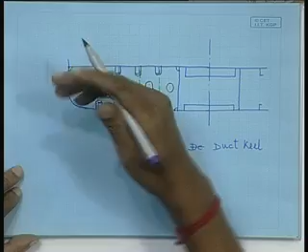So, today we will be starting with duct keels. Wing tanks, we have talked about yesterday. Duct keel. We have been talking about the keel plate, bottom shell plate, right? There the central plate at the bottom shell was the keel plate. Now, here is a concept called duct keel.

As you can see in this figure, this particular assembly is the duct keel. That means this one, the one which is encircled, that particular construction is referred to as duct keel construction. It's nothing but part of the double bottom, right? We are separating it out. Like we have talked about double bottom, this part is familiar.

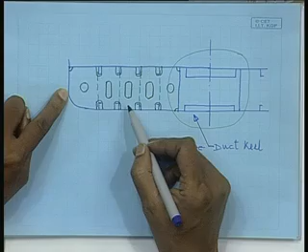There we have the plate floor, the bottom, inner bottom longitudinals, stiffeners, and here instead of a central line girder, I have two side girders, right? Previously we have seen one central line girder and a keel plate below. So, here the central line girder has been replaced by two side girders, and rest everything remains same. Only one half is shown; the same thing is on the other side also.

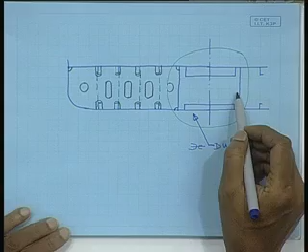So, this arrangement of two adjacent side girders near the central line is referred to as duct keel. The duct keel arrangement is forming a duct, right? This space, as you can see, is forming a clean duct, and this is running all along the length of the ship, as I have tried to show here. These are the two side girders running along the length of the vessel. It's only one block we are showing. These two are watertight side girders, so this space becomes a protected closed duct.

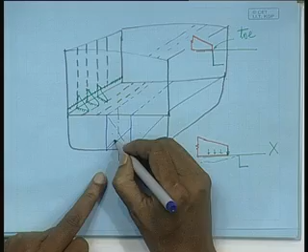What is the great use of this arrangement? One is definitely it provides a much better support for the ship structure. We had been talking about putting the ship on keel blocks, right? There the central line girder is there, you have the keel plate, below that the central line row of keel blocks. Here, if I put the keel block, it gets an even better support. The vessel gets a much better support, because the whole load is now being shared by two girders instead of one. So, that is one advantage.

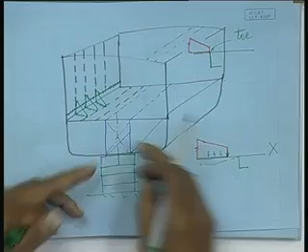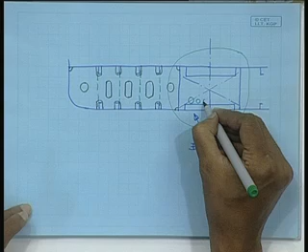Second advantage, instead of one central line girder, I have two of them. So, obviously, it provides higher longitudinal strength. And thirdly, which becomes very effective, this particular duct can be used for laying the pipes or various kinds of ducts, cables, right? Because all along the length you will have all kinds of pipelines running, electrical cables running.

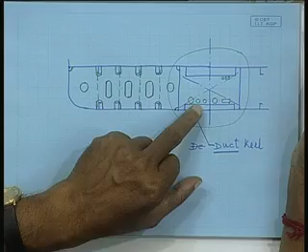Otherwise, had there been no duct keel, they would have had to run through the double bottom space somewhere. If that space is being used for ballasting, they would have been submerged in water whenever it is in ballasted condition. Whenever it is empty, fine. But here they get a very neat and clean environment. So, the maintenance of these pipelines or cables becomes easier, and the possible corrosion of the pipeline is also less. Otherwise, they would have had to pass through spaces carrying fuel oil, fresh water or ballast water.

So, this space not only helps in providing better strength, but also provides a good space for passage of these pipes, cables, etc. If anything else is needed, some ventilation duct or ballast pipe, drainage pipe, various kinds of piping systems, that space can be used.

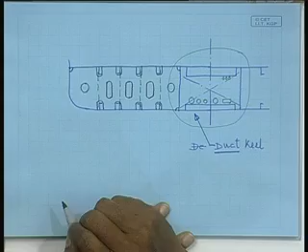Now, as far as the structural details are concerned, as you can see, the rest of the double bottom is longitudinally stiffened, right. But here we have drawn transverse stiffeners. This is a transverse frame, and at the bottom also is a transverse stiffener, instead of any longitudinal. Why? Because the spacing is the frame spacing. This is one frame space.

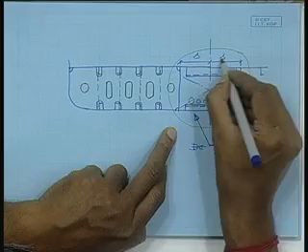Generally, the side girders will be placed one frame space port and starboard. That means the size of the duct will be twice the frame spacing, right. If it is twice the frame spacing, then either you provide, at the center line, some bottom longitudinal and inner bottom longitudinal here, or provide a transverse stiffening member.

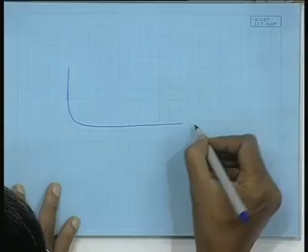Here the transverse stiffening member is the preferred stiffening arrangement, because in that case, over this you can lay the pipelines, you can lay the cables. We have talked about that the longitudinal framing system is better to adopt, isn't it, because of its superiority in terms of buckling strength. Now, here we are deviating a little bit from that.

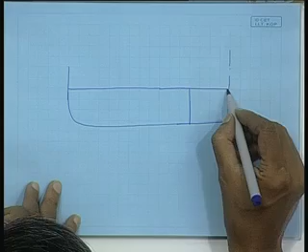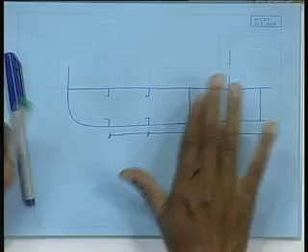I am just drawing only the duct keel part, right. So, the stiffeners are like this. This is my frame spacing, they are equally spaced. So here the unsupported span of the tank top plating or the inner bottom plating, as well as that of the bottom shell plating, is becoming twice the frame space, because here we have the two girders spaced one frame space apart, right. So naturally you will have to have a strengthening member like this, because there is no point giving another center line girder here, then the whole purpose is lost, right.

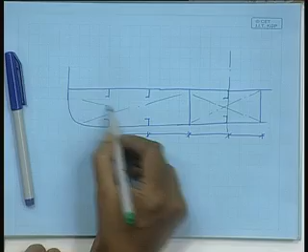So, if I provide like this, it is also a feasible solution, right. And this space now is becoming available to me. I can keep it empty, I can use it for ballasting, I can use it for fresh water, anything. But for that, all these spaces are already there. So this space is gainfully utilized for passage of pipes, cables, ducts, right, that becomes convenient.

So, if that is so, then I will have to lay the pipes, for example. How do I lay it? Because you cannot just keep the pipe on the floor, you have to tie it, clamp it, right. So then you have to keep the pipes on the shell, which is preferably not a very good idea, because how do I then clamp it? It has to be clamped to the shell. So I will be unnecessarily doing some welding here, which may not be a good idea.

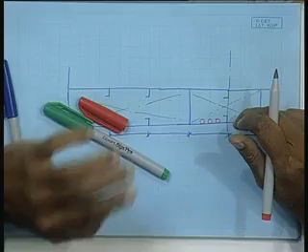Why? Because in time, all these pipes sometime or other will need some maintenance. You have to open it, replace it, repair it. Every time you do that, this welding has to be cut and re-welded, and that is not a very healthy thing to do on the shell plate, because by doing welding, you may impart some flaw there, which eventually can cause further damage to the structure.

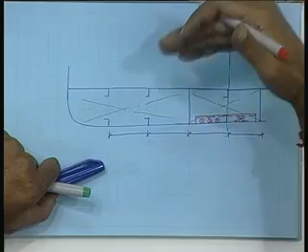So instead of that, it will be better if you have some platform, some support over which you lay the pipes like this. So in that case, instead of having a longitudinal stiffener here, we have a transverse stiffener. That means at every frame space you put transverses. Like in this plane you have the floor, similarly the transverse stiffeners, but they will go at every frame space, right, like this.

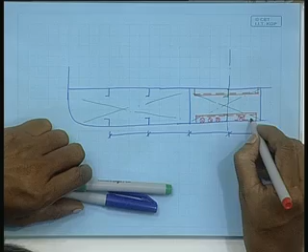So this frame is referred to as the bottom frame of the duct keel, and this is referred to as the reverse frame of the duct keel. You know, all members have some name. So that is the name. This is the bottom frame of the duct keel, that is the reverse frame of the duct keel.

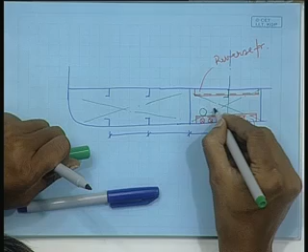Now, that is how it provides necessary strengthening to the bottom shell as well as to the inner bottom plating, and also provides sufficient space, as well as proper means of laying your pipelines and cables and all other utility services, whatever lines are to be taken, right. So it can be laid there. The purpose of this transverse plate is not only for laying these pipes. Main purpose is for stiffening this unsupported span.

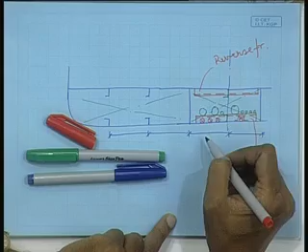Right. Main purpose is that, and while doing that, I simultaneously get as a byproduct a good support. It does not give a surface as such, because you have the frames at intervals, but I have one horizontal plane where I get a good support to put these pipes, cables, etc. Main purpose is providing stiffening, to provide strength, to give the required section modulus, because if the stiffeners are not there, under load this will deflect, isn't it, because it can sustain an unsupported span of only the frame space.

So then, will it be better to go for a longitudinal frame? It's not a question of better or worse here, because if I provide a longitudinal frame, well, it is supported. With a transverse frame, it is actually better supported, because then the entire plate is supported here, right, and I am providing it at every frame space. Only thing, to provide the proper load path, you have to put the brackets like this, right, with this side girder. Now it is bracketed.

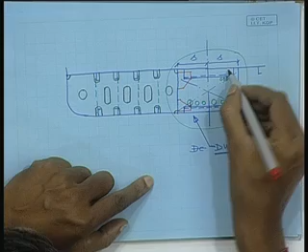So, brackets are provided. So, sir, no need for that longitudinal. There is no more need for longitudinal. This longitudinal is not there. The construction is like this, right? Or a cleaner version, let me draw, I will show you.

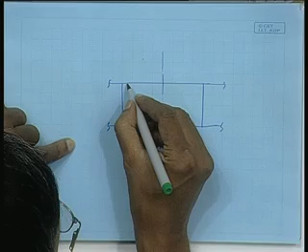So, what is happening is, you have this bottom shell plate and the inner bottom plate, right. Then you have one side girder, the other side girder, right, and then you have your, well, let us draw by different color, it will be visible better. So, this is reverse frame.

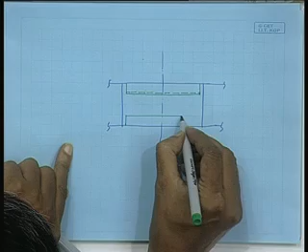The significance of this dotted line, what does it mean? This dotted line I drew, what does this signify? Angle section. Hmm? So that is an angle section. No, that there is a flange. Okay, that is a very particular answer. Angles. It can be also a bulb section, right? But not T section. Had it been T section, this line would have been continuous.

It's a flanged stiffener. That flange can be a flat bar, right? That of an angle section, or can be a bulb section. If it is a bulb section, that is also a kind of a flange. That is also shown by dotted line, dotted or firm line. Dotted line means it's on the other side of this plane, right?

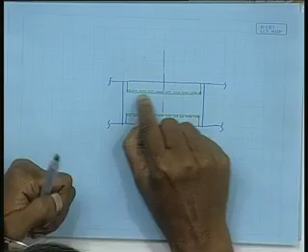Why I have shown it dotted? Just to show the bracket in full lines. Otherwise, that means the bracket is on this plane. Had this stiffener been on this side, I would have drawn a firm line. The bracket is on the other side. It is a simple thing, but these are important because you see where you will put this. Okay, let us first draw the bracket, then we will come back to this. And the bracket is something like this.

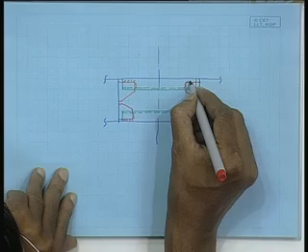So, this is welded, right, and obviously the other leg of the bracket is welded to the girders. Okay. So, this arrangement is repeated at every frame space along the length of the vessel, right. This arrangement is repeated at every frame space, right. So, what happens? This is very well stiffened, right.

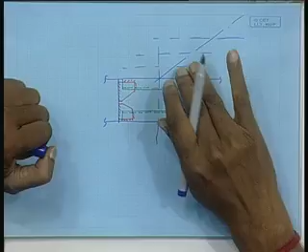I mean to take any load whatever is coming on the deck, on the tank top, as well as when it is being put on the keel blocks, because the keel blocks, as we have told you, are only at intervals, right. Obviously it is not a continuous support. This is my ground level, and you have the keel blocks like this. A block of wood, stack of wood, particular dimension over which it sits, right.

There can be three such rows of blocks over which the vessel sits, because of how you build the vessel. We have talked about units and blocks, right. Those blocks have to be joined together. How do you do that? So, those blocks are brought and placed over such keel blocks. They are aligned properly and welded. Entire hull is welded, and then all the necessary structural connections internally are made. All the pipe connections, cable connections, all continuity are done.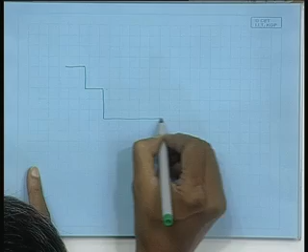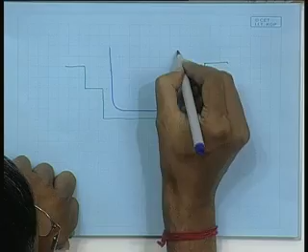So, once that is completed for the entire length, then this whole thing has to be lifted and put in water. Is it really lifted and put in water? It is either slid down, right, or floated up, one of these two. Okay, a little bit we are deviating from our topic, but still maybe that is worthwhile to know. So, there are two ways of doing it. Say, so it can be something like this.

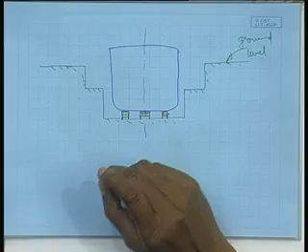When we are talking about keel blocks, that becomes more relevant in this case. This is a cross section. What we have drawn is that of a, what is it? What do you think it is? I have tried to draw. Is it not telling you anything? This is the ground level. What is this?

Say a ship is built, right? It is delivered, it's serving its purpose, then say after 5 years you have to bring it back and do some underwater repair, right? I mean the underwater part of the hull, the painting has got spoiled, or some small damages have taken place, or whatever. Even if nothing has happened, there is a mandatory requirement that you will have to make it dry and do thorough inspection, and whatever flaws you find, you will have to do necessary repair. How do you do that?

You have to bring it to the shore, isn't it? You have to lift it up in the shore. How do you lift it? Is it physically possible? Then what do you do? Dry dock. This is a section of a dry dock, right? This is what is a so-called dry dock. Water is removed from it. So what happens? The dry dock extends to the waterfront.

There are gates, vertical gates. So this is the dock. You have the vertical gates. So if you open the gate, water will come in. You close the gate, pump out the water, it becomes dry. That is how. For taking in water, we do not open the gate, we rather pump in water and then open, because if you suddenly open, you cannot do that, neither can you open it, the amount of force it will be. In any case, there is a dry dock. So in this dry dock,

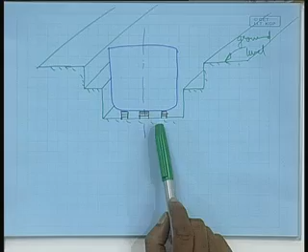when we had been talking about the various characteristics of the shipbuilding industry, this is another important phenomenon in this particular industry, that for any other industrial product, delivery to the customer is not a very big issue. Physical delivery to the customer. When we talk about industrial products of consumer nature, even the customer himself takes care of the delivery.

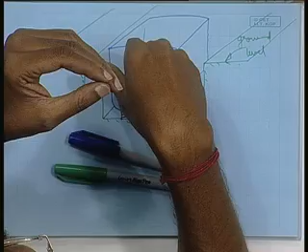When you buy a television, generally you go to the shop and bring back the television. The seller puts it in a packet which is comfortable to handle, so one can lift it and put it in the car. When you take delivery of an automobile, you just drive it out from the showroom. When you take delivery of an aircraft, you just drive it out from the hangar. But when you take delivery of a ship, you cannot drive it out. You cannot lift it and put it in your car.

It has to be first made waterborne. First you have to put it in water, then only you can drive it out. An aircraft will remain on ground; of its own power you can drive it out and fly off if you have an airport nearby. So this is very peculiar. This product you have to first put in water, and putting it in water itself is an exercise, because the size is such that you cannot lift it. So it has to slide down using its own weight. This process of putting vessels in water is termed launching.

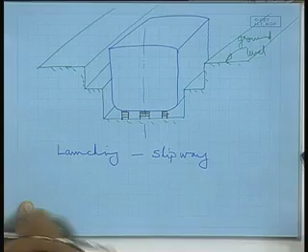Launching, right? It can be launching through a slipway. Launching means putting it in water, because you cannot go on constructing it while afloat. You can, but it makes your life much more difficult. On water it will keep moving, and not everything you will be able to do. The hull work you will have to do on shore. Doing it in water is possible, but much more difficult. So it has to be on shore.

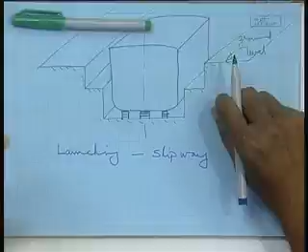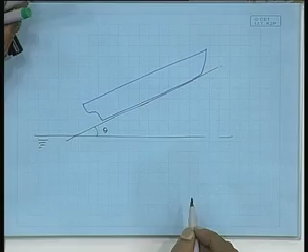Once the whole thing is built, it becomes so huge, so putting it in water itself becomes an issue, and one way would be through a slipway. You slide it down. It sounds very interesting, slide it down, like this. Of course, I am drawing it in a very exaggerated fashion. The angle is never this much. This is referred to as declivity. So this is my water level. So what happens? It slides down.

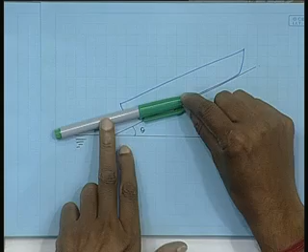When it is sliding down, what is the guarantee that it will not plunge in water? The way I have drawn, isn't it appearing that it goes like this? So the whole process of launching has to be designed so that when it goes in, it floats up, almost like the movement of this pen. It will go in water, and at a certain point it will start turning like this and become afloat. If that does not happen, it goes straight in. Because this will be the built up space.

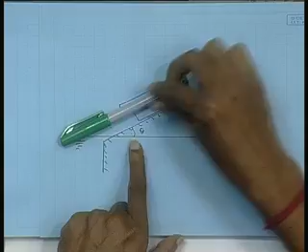So, if this happens, that means it is going in water, and then it should float up. What does that mean? That means it should go on getting buoyancy, develop sufficient buoyancy such that a moment will start working and putting it up. So, this moment and the going down moment, which is called tipping moment, right. The difference between these two: the pivoting moment should be higher.

So, that means it matters where the CG is, isn't it? Otherwise, what will happen? It will go and it will just plunge in water like this. So, that is what is called anti-tipping moment. Anyway, so you can see the whole process is tedious. Not only that, it will float up and will not remain steady, it will keep drifting.

And imagine your river width where you are launching, suppose the width is not sufficient, say 800 meters. So, it goes in water and it will keep drifting and go and hit the other side. You can't stop it. Had it been a car, you could have jammed the brakes. Here what do you do? Run the engine?

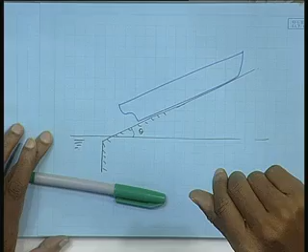You cannot run the engine because when you put it in water, the engines are still not fully installed, because ships are put in water from the slipway in a semi-complete condition. Semi-complete means all the steel work has been done, but many of the fitting out works will be done elsewhere. Why? Because the slipway is an expensive thing. Like a house you built, you erect the walls very fast, but then substantial time goes in fitting the plumbing, electricity, all that.

Same thing in ships. The erection of the hull, the steel work, is very fast, but then putting in the machineries, laying the pipelines, the cables, the fitting out work, all kinds of auxiliary machines, everything, takes a much longer period. So you cannot keep the slipway engaged on that, because that can be done while the vessel is afloat.

In the afloat condition that is possible to do, because you will be working on board, inside the vessel. So no problem if there is water outside or if the vessel is floating and making some movements. So that is why it is launched, right? When it is launched, obviously propeller, shaft, everything is not fitted. So you do not have power, you have no mechanism to brake, so it may go and hit. Then what is the solution?

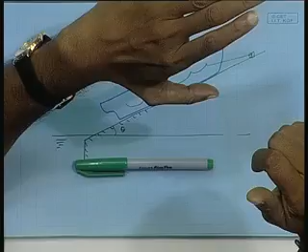So you will have to have arrangements for braking. There are ways: you have chains connected which are clamped on the shore. Now if you really connect it in such a fashion that the vessel goes, and you can imagine the momentum, right? Either it will break the chain or it will tear off the plate where it is connected. So the purpose is not served.

So that is what is very interestingly done. These connections are such that slowly, when it floats in the water, gradually the tension comes on this chain, right? One after another they will start failing in a sequential fashion. So that will absorb the momentum. It will fail in such a fashion that it will not cause harm to the hull, but only the connection will give way, right? One after another. That is very interesting, how it is done.

But still there is a risk. If you do it wrongly, your hull gets damaged, or if you are too careful to protect the hull, then the braking becomes ineffective, meaning you go and hit the other side. What is the other solution? Side launch it. Instead of end launching, which is what this is called, where it launches and goes and hits, I launch it sidewise.

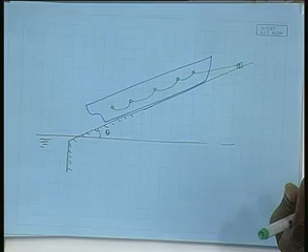But the problem of tipping is much more, right? So that's a very tedious job. All these operations are very clumsy and tedious. I won't say difficult, tedious. Best is you build it in a dry dock. In the dry dock, the dock is dry, meaning the gate is closed. You have the rows of keel blocks laid, and depending on your handling capacity, you start installing the sub-assemblies here.

Generally the minimum thing installed is the units, meaning you start with the double bottom and then bring the side shell to erect, or if you have more handling capacity, this entire block is fabricated in the shop floor. From there it is transported here. From the shop floor you will not bring it hanging in a crane, you will bring it in transporters. There are specific heavy duty transporters which can carry such loads. So, you will bring it, and from there with a crane you put it on the keel blocks. So, there the function of the keel blocks comes mainly.

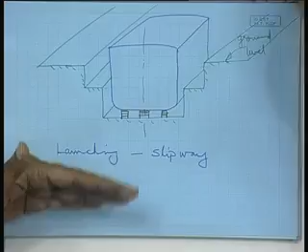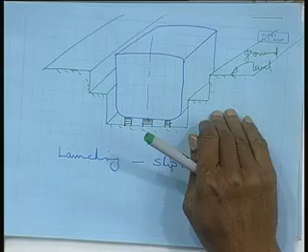And when everything is complete, and here the advantage is you complete everything and then start taking water inside, release it. So, it will float up automatically and go out. When it is on the slipway, these keel blocks are not there. There is a different kind of support, but for construction, repair, maintenance, or dry inspection, you have to put it in a dry dock. This is a dry dock, where it will sit over these keel blocks, and the load comes on them.

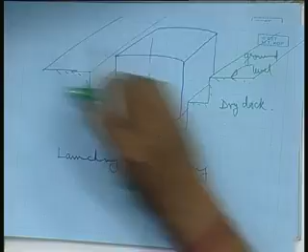So, you can see the entire load of the vessel will be supported at only certain points, 3 columns of blocks and a certain number of rows, with sufficient gap between them. So, the entire weight of the vessel is supported at these points. So, naturally the structure has to be very strong there. How these keel blocks will be laid will depend on the construction inside; where the keel blocks are to be spaced, you will have to have some heavy stiffening members there.

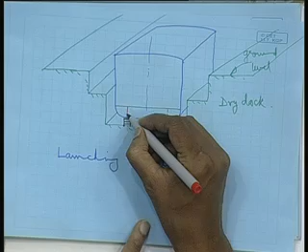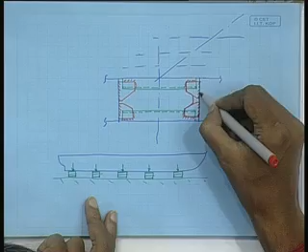You cannot keep the block somewhere here, that place will get dented, isn't it? So, that is also one aspect of the stiffening members, to support the load. So, that is the function of the duct keels, and here as we see the connections are with brackets. This is the simplest way of doing it, you have 4 separate brackets. So, the alignment problem is not there at all, or it can be converted into just one piece like this.

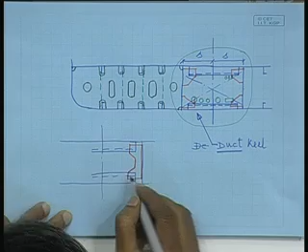That means here you have the bottom shell plate on one side, this is the reverse frame, you have the bottom frame, and you provide a bracket of this shape. That is also possible. Then, the function of brackets is to provide for the end connection, a proper end connection, to provide for adequate load bearing area.

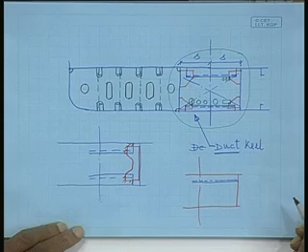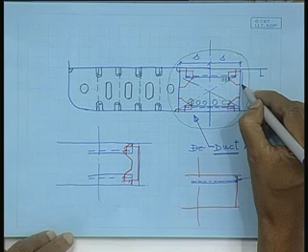Because if, instead of providing the bracket, I had extended the frame and welded only there, say you have the side girder and I just extend it right up to the end, this corner I cut off, it needs to be cut off because of the fillet welding there. So, I get only this much of welding area, the welding area is much less, isn't it? By providing a bracket, I am increasing the welding area so much. That means the load support is increasing.

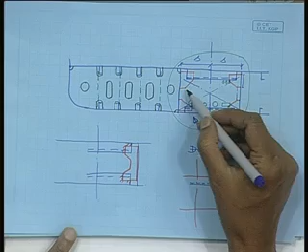So, if I do it this way, as far as the reverse frame and the bottom frame are concerned, they are perfectly fine. But what about the stiffening of these girders? Because they will be there at every frame space. So, either I have to provide an additional stiffener here, or I make it as a continuous piece. One single piece does both jobs, because providing a stiffener, again the question of end connections will come. And depending on the depth of the double bottom and the size of the brackets, there will be a small space left. Providing another small stiffener, it should have continuity with the bracket connection. So, that may prove to be a difficult alignment problem, because not all will be correctly spaced.

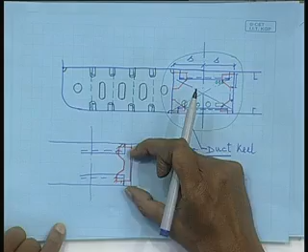The problem is, even if it is 5 millimeters out of alignment, the thing will not fit. So, instead one single piece can be taken, which can have sufficient play in this direction. If I put it a little upwards or a little downwards, it does not matter, because I have sufficient clearance on both sides. These are my clearances, isn't it? They are generally of the order of 50 millimeters.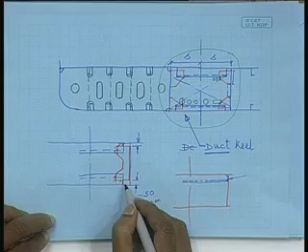They are generally of the order of 50 millimeter. Why not 25? Why 50? Again, why not 100? The reason it is not 25 is simply because the clear space will become very narrow, and becoming narrow means it becomes difficult to maintain that point. You will have to provide painting, otherwise there can be a possibility of corrosion, right. So, once the construction is done, each and every nook and corner has to be accessible for painting purpose. This painting is necessary, unless that is done, again it will lead to corrosion. So, that is why it cannot be small.

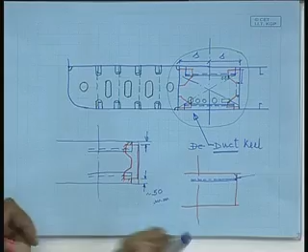Keeping that in view, we can keep 100 millimeter, then it will be more comfortable to paint. Then again what happens, your bearing area becomes less. Suppose your depth of this is 200, and if I keep 100 millimeter gap, then this becomes only 100. So, support area becomes less. So, it has to be some optimum. Generally 50 to 75 millimeter is kept. That is the simple logic. Okay. So, that is how this duct keel. So, this entire construction is referred to as duct keel, because it forms a duct.

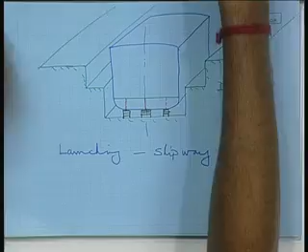Well, now, so that way we have looked into the double bottom construction, right. Wing tanks. Well, wing tanks are not there in all ships, in the bulk carriers mainly, but all ships will have double bottom construction. The construction philosophy is same. Duct keel. Well, duct keel is also not a must, but it is preferable, it is a good design practice to provide for a duct keel.

Well, if sufficient space is available. If the vessel is very small, say a river barge, right? River barge means whose carrying capacity is say 300 tons, 500 tons. So, a duct keel kind of arrangement, a double bottom, all these things may not be there at all, right. So, the question does not arise, but in any other ocean going vessel, whatever is the size, possibly it would be a good practice to provide for duct keel always.

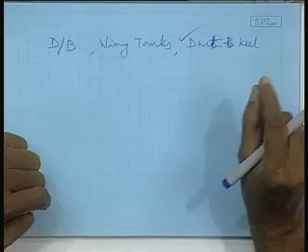That may add marginally to the cost, but in the long run it will be beneficial for the ship owner, simply because possibly he will save much towards maintenance of his utility lines, because in ships there are various kinds of pipelines, right, freshwater line, seawater line, bilge line, firefighting line, so many pipelines will be there, electrical cables will be running. So, maintenance of those becomes easier and better. So, duct keel.

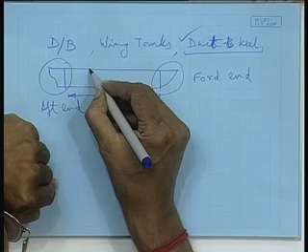And then we have, as we see the vessel, these two parts. This is forward end construction, aft end construction, right, and rest part of the construction within this zone, they are generally identical. Only difference is in the engine room. The difference is like this: you have the holds, you have the double bottom.

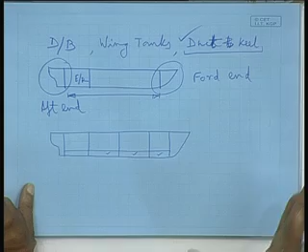All construction what we have talked about, the double bottoms, these double bottoms will be identical. That means the same methodology will be taken. Inner bottom longitudinal, bottom shell longitudinal, floors, bracket floors, plate floors, solid watertight floor, all those things will be there, right. Similarly, in the side shells, the decks will be same, identical. By identical, I mean identical arrangement. The dimensions of the stiffeners, so called scantlings of the stiffeners, or the shell plating thicknesses, they may be different, but the arrangement, deployment of stiffening members, all these things will be same.

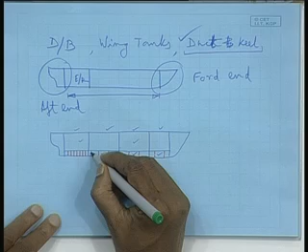In engine room also the decks, shells will be same, only difference will be in the double bottom. What is the difference? That here we have floors at every frame space, rather I would say plate floors at every frame space, whereas in other places the plate floors are at intervals. And in between you have so called bracket floors, that is the difference. Otherwise, again mostly everything remains the same.

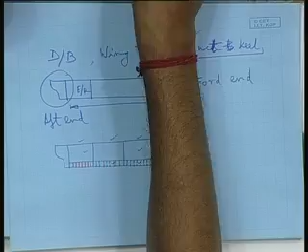That means this is basically a bracket. What is it doing? It is connecting the bilge plate with the inner bottom plating and the immediate stiffeners, longitudinals. So, a connection is being made. Similarly, here the inner bottom plating, the bottom shell plating and one of the side girders, right.

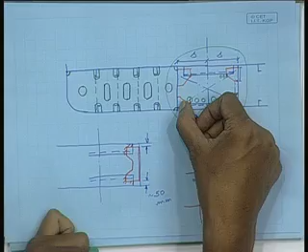So, that is what it is, the bracket floor. But in the engine room the difference is every frame space will have this kind of plate floor arrangement. This is a plate floor arrangement. It is done because there are very many concentrated loads there. The main engine is there, the various auxiliary machineries are there, and so on.

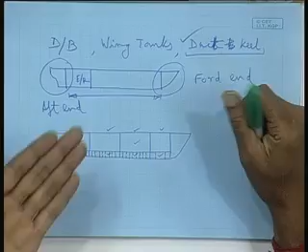That is why we put a solid floor or a plate floor. A solid floor is also called a plate floor; that does not mean it is a watertight floor, it's just the name. A plate floor is obviously a much stronger arrangement than a bracket floor. It is provided to support the many concentrated loads in the engine room, that is number one. Number two, by providing additional rigidity it changes the frequency of vibration of the structure.

Here the engine will be there, it is a moving machinery, so it will provide an exciting force for vibration. What would be the frequency of that exciting force in the engine room? The engine room structure may get subjected to vibration, like when you sit in a car and switch on the engine, you feel a vibration. Where is the vibration coming from? From the engine. Why? Something is rotating, and that is getting transmitted.

Obviously, if the vibration is too much, you won't like it from the comfort point of view, and secondly, what may it lead to? A fatigue failure. Because what is vibration? What is the difference between vibration and oscillation? Oscillation is particular and small, in vibration the whole thing vibrates. So vibration is random? No. Oscillation has some fixed frequency. Oscillation is about fixed points.

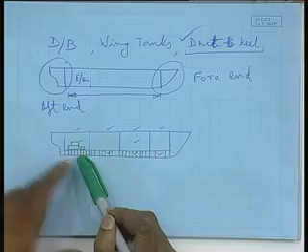And worst is if the vibration amplitude increases: resonance. So to avoid resonance, we make it more rigid, more stiffened, such that the fundamental frequency of vibration of the structure goes above the exciting frequency. The exciting frequency is the RPM of the engine and primarily its multiples, the number of propeller blades. So that is the difference in the double bottom of the engine room. The rest is the same.

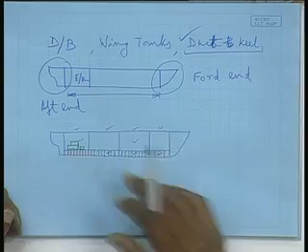And then we will look into the forward end construction and the aft end construction. We have already talked a little about forward end construction. We will try to see it in more detail. Okay.